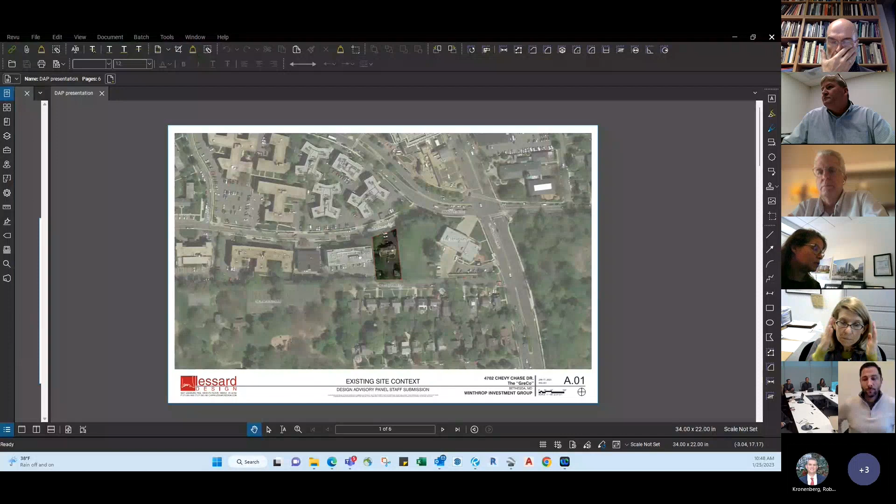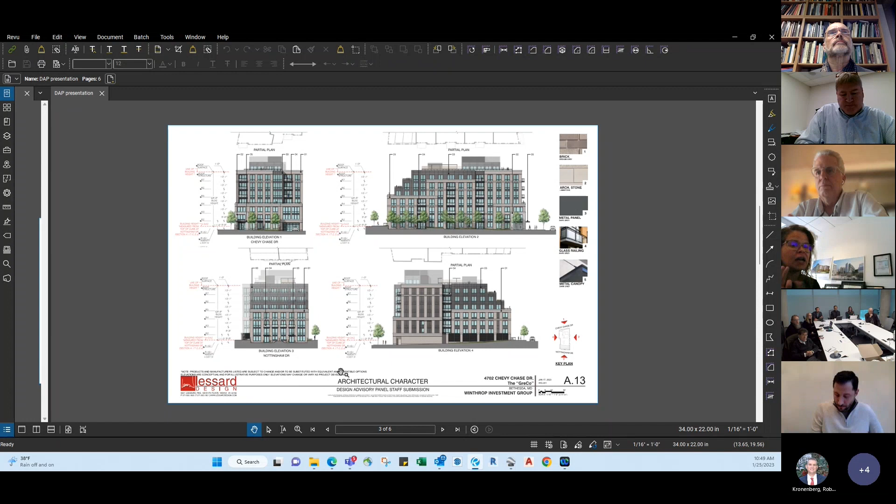If I can summarize briefly, I'll jump right to the elevations. What we did is we took your feedback, like Pat said, and focused on simplification of materials - how can we simplify the details, how can we add consistency in the details, and how can we refine some of the massing moves in order to come up with a cohesive design. I'll share with you elevations side by side of the different moves that we did to achieve this, and compare with what you saw last time.

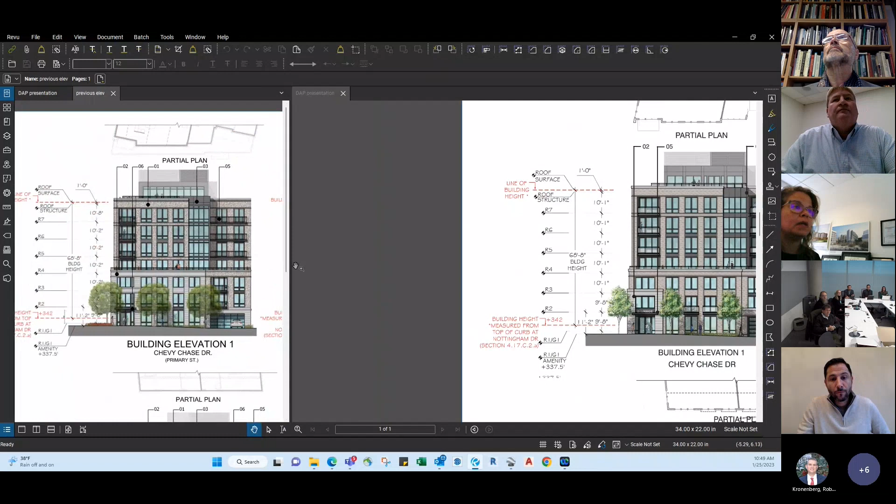On the left side of the screen, I'm going to show the previous elevation, and on the right side of the screen, this side will show where we are today.

Starting with an overall look, one of the things we addressed was material. We reduced some of the stone materials we previously showed as a 3-story stone element, which was competing with the rest of the materials, so there was no dominant material or hierarchy in terms of material and texture. By reducing it and only highlighting the entrance, it makes brick the dominant material of the building on this facade, and it focuses attention on where the entrance is by changing material only at that location.

We also looked at what happens above the garage. The garage is recessed, as you'll see in the rendering, so there's depth in this area of the elevation. We created symmetry in the design by using similar windows and narrowing the pillars in the middle, so it feels like a larger opening with pillars on either end below. That was one of the comments we heard, and by doing that, the weight feels like it's going to the edges rather than the middle.

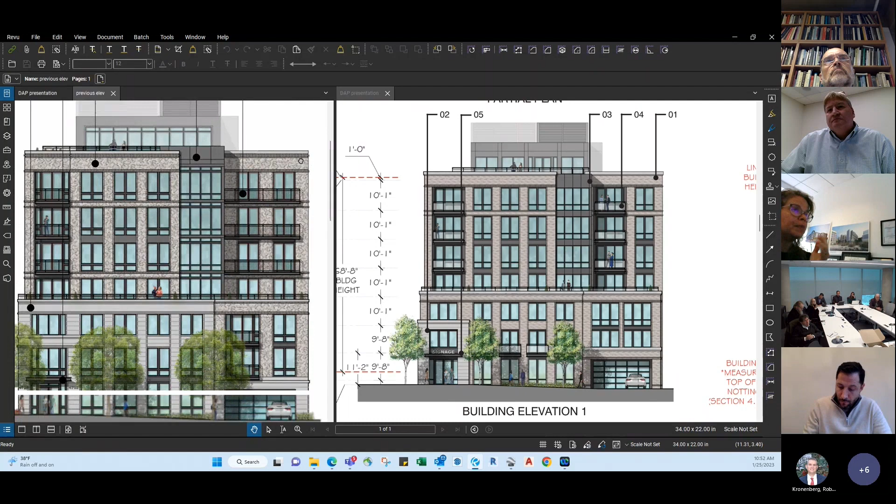Another comment was about making consistency in the details of the cornices. In the previous design we were showing a variety of details at the top of the cornice. So we went back and analyzed how we could bring consistency in the dimension and how we treat the upper part where the brick ends. That's one of the differences you see between before and after.

Another change, these are subtle changes, but I think they bring the design to be more cohesive, simplify it, and bring elegance.

We looked at how to combine windows into a more vertical design and let the pillars come down and align with the pillars happening at the lower level. One of the things we did while looking at those cornices was to create similarity in the depth and the height.

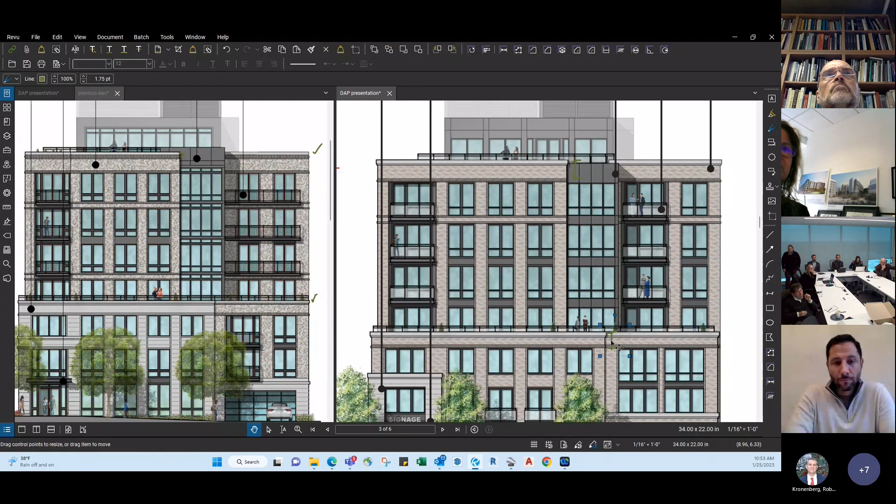We played with what's happening at the header of the windows, for example. We added an element at the header of the window to get similar distances in the design, from the top of the window to the top of the cornice. So that's the front elevation.

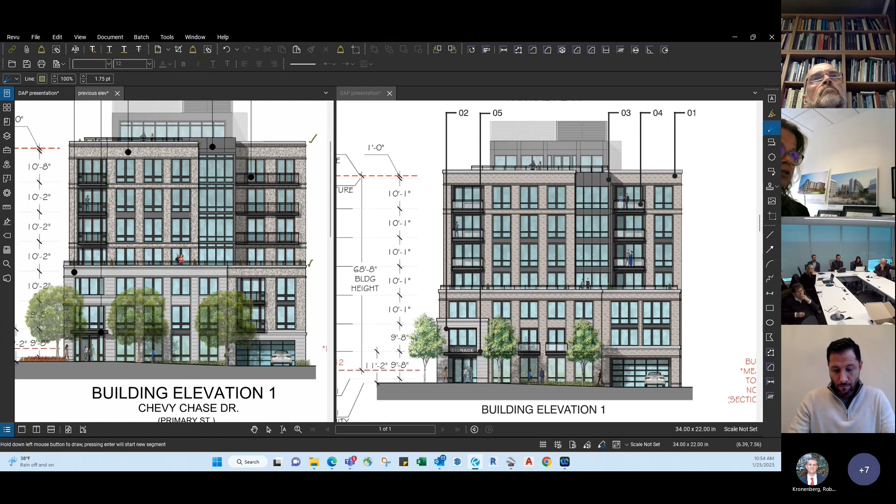One thing we did differently is provide some Juliet balconies more at the pedestrian level, just to provide more articulation in the facade and make that area more active. That's the big picture of what we did on this elevation.

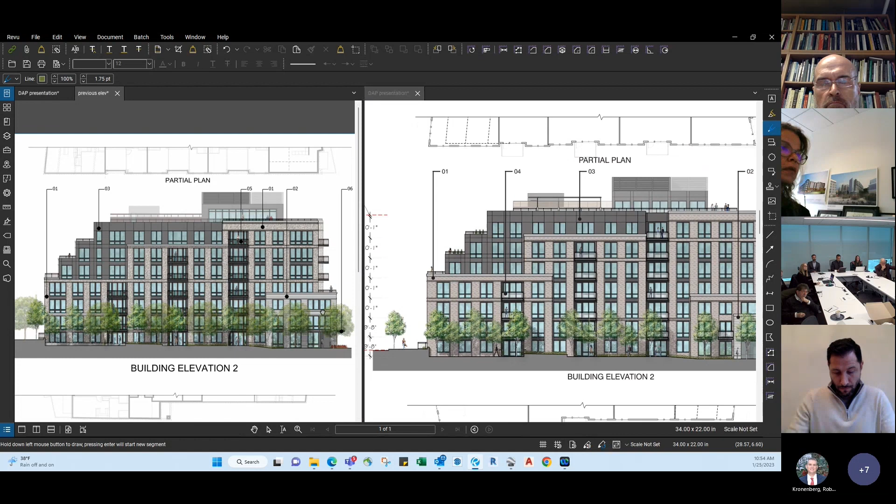Then I'll move to the east elevation, the before and after.

Again, we reduced the stone material. Before, we were wrapping this stone material over to the side of the building. One change we made on this elevation is that before it used to be only one plane, except for the recess of the balconies. So we played with the depth of the wall itself to provide a break in the massing and show variation in where the materials end.

So we introduced a break here, using the balcony to create that recess in the massing of the building. We reduced the stone material here and only provided it at the entry of the building, creating a gateway or archway, like an exterior vestibule into the building. There's a change in plane at these elements here and here.

Then as you go to the southern part of the building, it steps down toward the Nottingham side, and we introduced a change in the massing. It's a subtle change, but it helps provide different proportions to the sections of the building.

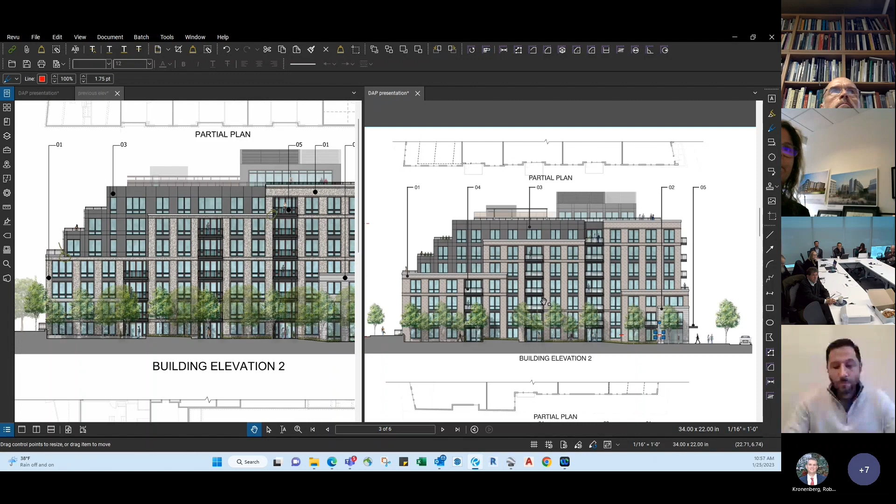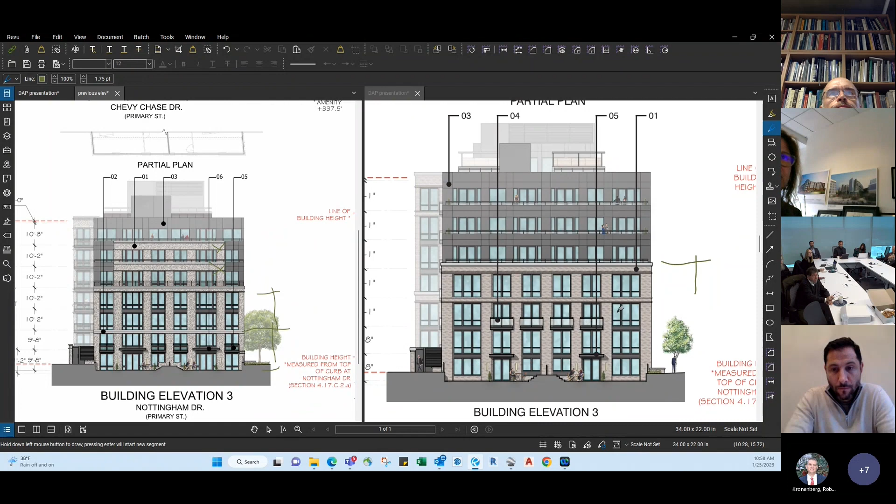In the rear south elevation, one of the comments was that maybe we're showing too much brick, or that the brick felt like it might be conflicting with too many details on the upper level. So we looked at when the building steps back and eliminated the brick happening above, keeping it simpler on the upper steps by having the same material wrap around. On the lower level, we kept the brick but grouped the windows to provide a taller proportion with groupings of three, following the same language as the groupings of three and how the cornices wrap around the building.

I personally think that before, the brick felt like it was just applied onto the facade—there was no change in depth. So we agreed that changing that to the metal panel looks much cleaner and simpler.

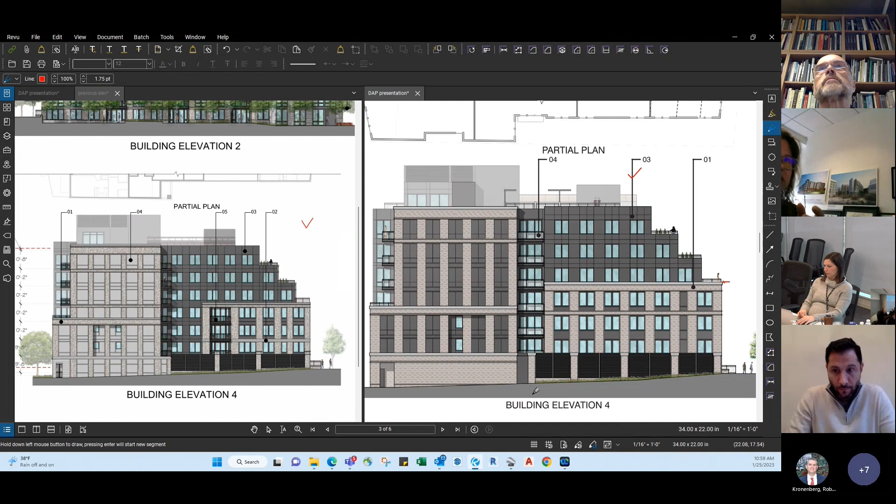Moving on, you can see we wrapped the cornice along this facade. This is before and this is after. We're using a balcony break here, similar to what's happening on the east facade, to break the mass and give the brick an opportunity to end in an inside corner, wrapping the detail across.

On this west wall, we heard comments about the color of the materials we were using, whether to have a light material versus the dark panel material. We looked at it in different ways: either a light color for a subtle change, or a dark material for a more cohesive language and material palette on the building.

So we decided to take that feedback, eliminate the light color material, and create more simplicity and continuation of the details happening in the building. The cornices wrap around with the same dimensions across, and we simplified some details so it didn't feel as busy as before.

For example, at the base, before we had a series of metal panels with variation. We thought that simplifying the base, making it more consistent with what's below and letting the details happen above, makes it a better design.

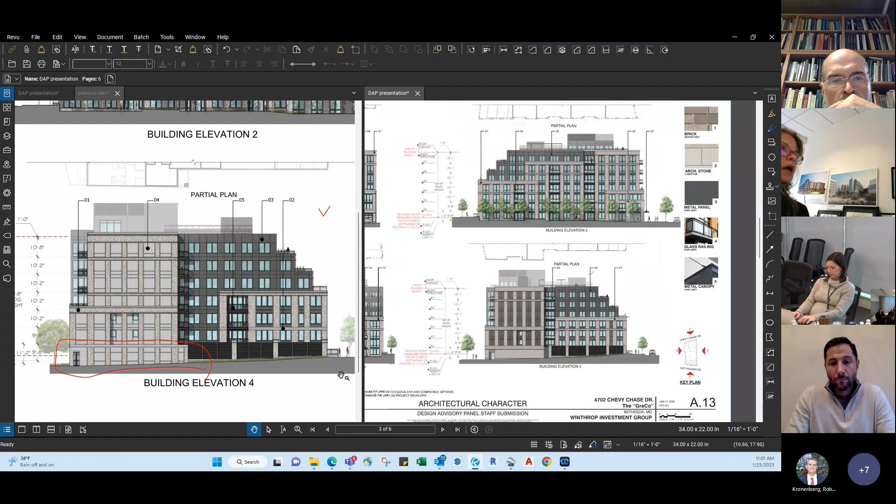That gives you a picture of the elevations, and now I'll show you the renderings. This is a rendering from Chevy Chase Drive. You can see that by maximizing the use of brick on the ground floor, it makes a more cohesive design and simplifies the variety of the building.

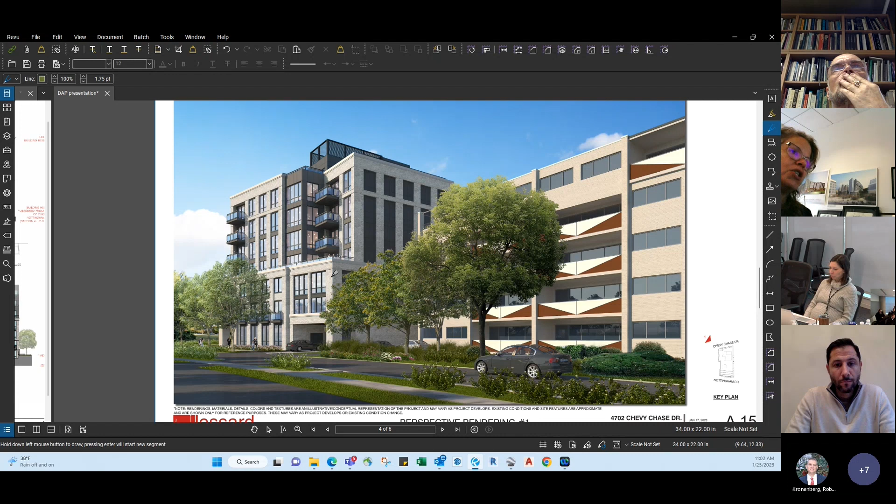You can see there's a lot of depth that you don't see on the two-dimensional elevation, and how the building steps and is articulated on this section. You can also see how the garage entry is recessed into the building, the change we made above the garage, and how the cornices and details wrap around the building.

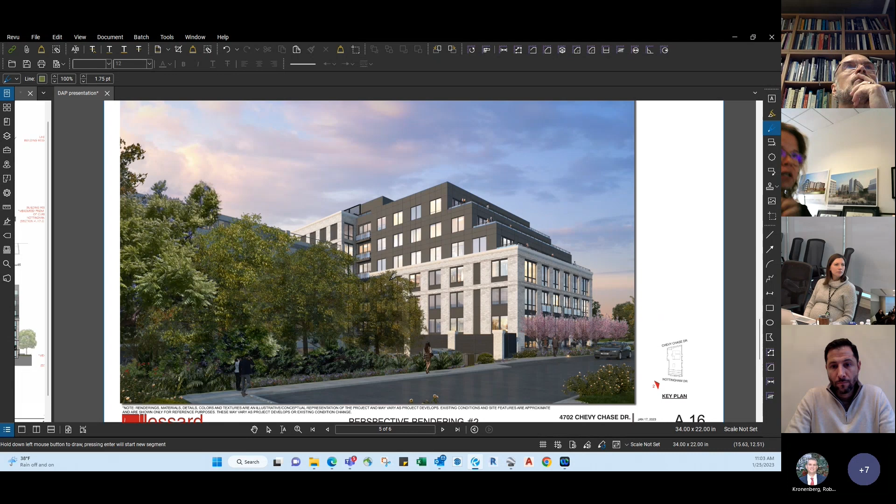This is a view from Nottingham. If you imagine before, we had brick on the upper levels—by removing that brick and maintaining the details on the lower portion, it gives a better proportion at the lower pedestrian level.

Finally, this is the rendering view from Chevy Chase Drive of the east facade. You can see how we use the balcony to recess into the building and have the brick wrap in and end on this corner, with a subtle change in massing to provide additional articulation. Our goal was to simplify the use of windows, details, and materials to create cohesion in the design.

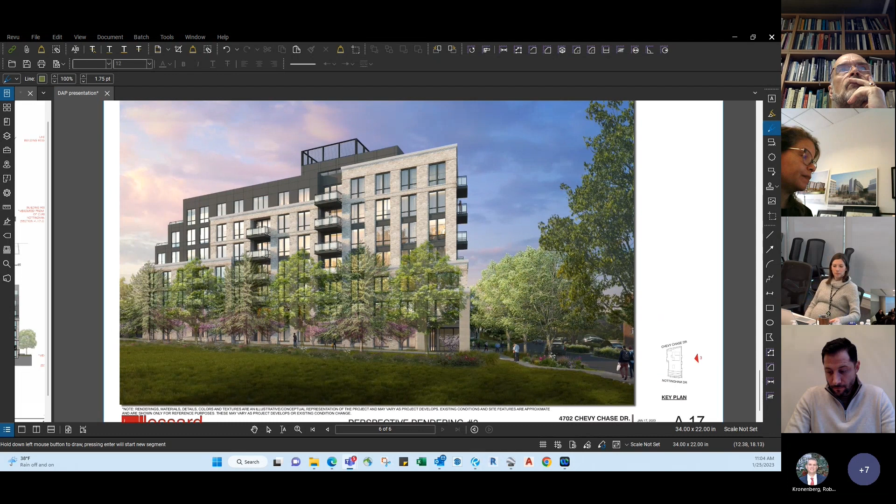And with that, Pat, I'm not sure if you have additional comments, but this is the last exhibit. Thank you, Liz. No, I think we're happy to answer any questions you may have.

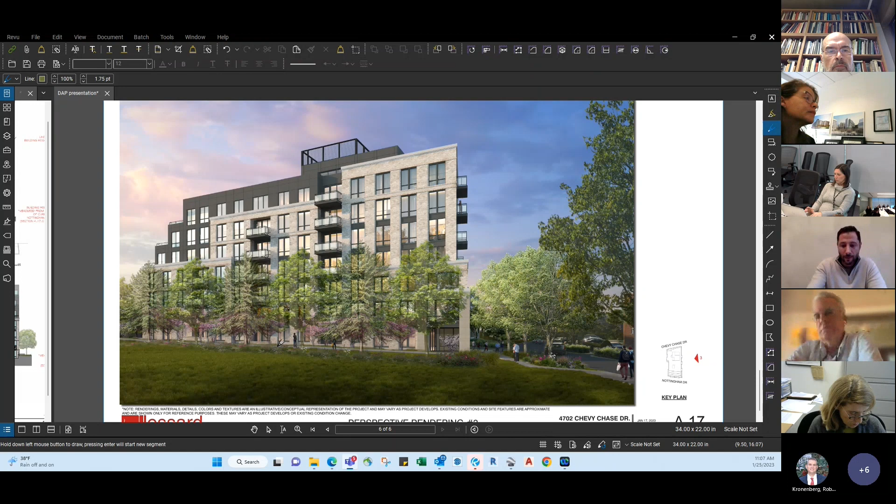So I think this definitely keeps going in the right direction. I thought it was an attractive building the last time we saw it, but obviously some of my colleagues had specific complaints here. But I think what the architect said, these are a series of subtle changes, and it definitely comes through and improves the look and feel of this building.

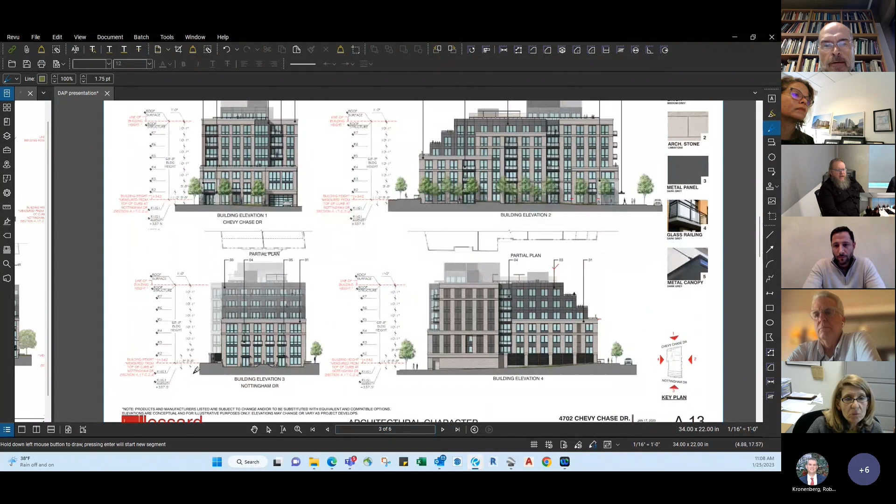Can you pull up the southern elevations so we can think about Brian's points? Brian, can you remember, do you have a rendering of the southern elevation? That would do it.

What I was saying is that if you look at the aerial that just flashed past us, the canonical new urbanist way of changing a building typology from a multifamily building like this one to a single family building would be done at an alley and not on a street front. But the block structure in this particular portion of town is circumstantial. It's just too small to do that.

So the zoning permits a big building, and I'm wondering if the big building can perhaps be modeled such that the facade on the southern edge might be broken slightly, so that maybe there's a possibility at the center base to push back slightly, and perhaps even model that more as a reveal, maybe even allowing that grayish material to come through, permitting a reading at that point of something more akin in scale to the buildings directly across the street from it, and kind of balancing off the street section to some extent.

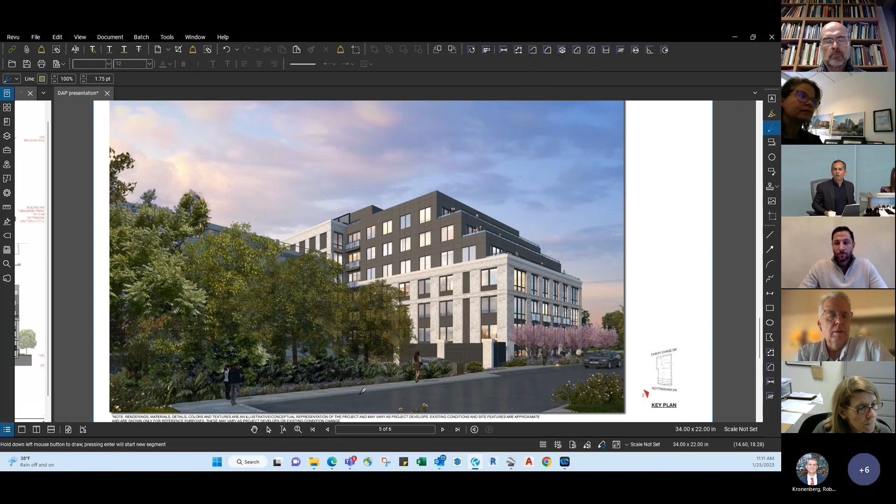Brian, this is Atul Sharma with the director's office. I'm happy to hear you bring up that Wardman apartment building as a precedent. I actually lived in that building for several years, facing Cathedral Street, and I think some of the points you're bringing up are really good, in that this building has created the horizontal stepping back very successfully, but it is perhaps the vertical articulation that you are trying to get a little bit more refinement on.

To your point, I think the Cathedral Mansion does a few things to bring down the scale. It does have the setting in and out of the bays. Those bays are much wider, but that effect could be achieved here with the 2-bay, 3-part composition. The other thing it does very well, it applies a very deep cornice at the 3rd floor level, as opposed to the 4th floor level, so that the building itself reads more like a 3-story building versus a 4-story building.

So I just offer that for the DAP to consider, that maybe on this facade, the main cornice application can be at the 3rd floor, and the building can have a little bit of a stepping back in the middle piece of it, and perhaps have a more significant entry piece at the first 2 floors, which is another element that's used in that precedent very effectively to break down the scale. So just wanted to share that with you all, and happy to hear the DAP's thoughts.

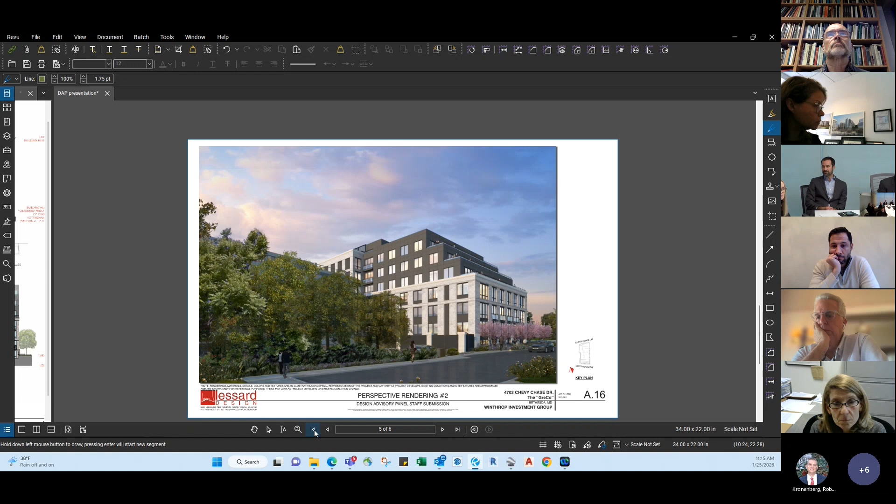Yulia, did you want to share some comments? Yes, I have some questions. Was there any discussion about what type of mechanical system, specifically exhaust, that would be used? And what I'm looking for is, is it going to be vertical or horizontal? Because, you know, if it's horizontal, we should probably see more detail in terms of articulation of that on the facade.

I guess that's a question for the architect. At this stage, we have not defined the details of how it's going to be ventilated. Both options are on the table. One of the things is because we have the green roof requirement we have to comply with, it reduces the amount of space we have for green space on top. So it might be that there's a combination where some of the ventilation is horizontal and some will be vertical. So my comment - at this stage it's not being fully decided.

Okay, I understand. So my comment would be that if it's a horizontal exhaust through the facade, it would be very important to show that on your elevations and renderings. It would probably affect the location of your operable windows, and as we look at the facades we would see thickened mullions around the areas where you have operable doors and windows. Aesthetics of those exhaust openings and their locations would be very important because they will significantly affect those facades - probably changing the rhythm of how you're dividing the volumes right now.

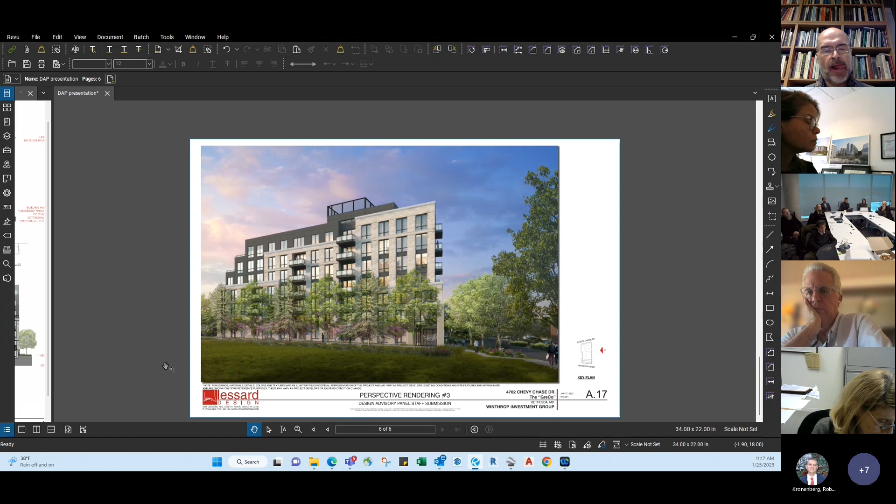And so I have a question - this is Elsa, Chief Down County Planning. Can you go to the front elevation? I don't think you see it on the perspective rendering. Maybe this gets to Rod's point about how it's physically articulated, but the asymmetry of it is a little jarring to me. Does anybody else have that sense? It's not quite symmetrical, but it's not really asymmetrical either - from a design excellence standpoint, am I alone in that?

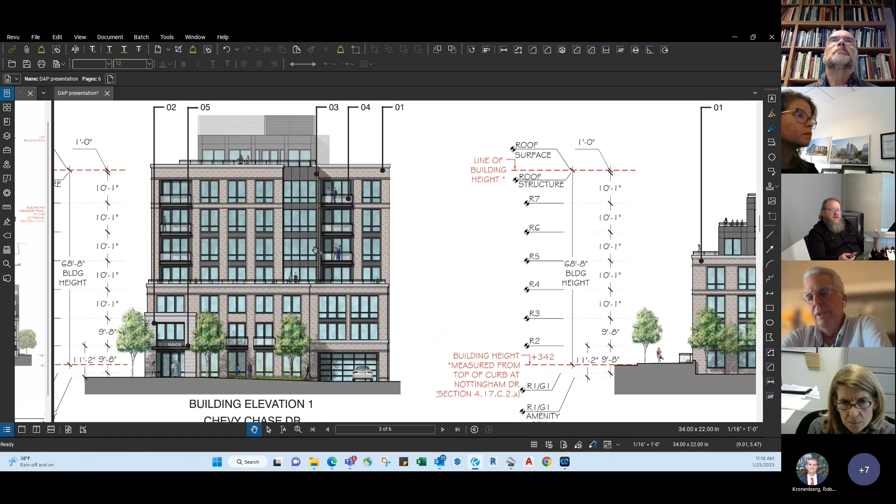Yeah, I guess you don't see that shadow line for the first 3 floors, right? When you look at the 2D, this is much better, but it's also from a very specific angle. I wonder what it looks like when you're right across the street and the shadow lines are actually correct. So when I look at the 2D, I'm a little concerned with the asymmetry and things not lining up with what's happening above. At the same time, there is a bit of a step back, so maybe there needs to be another rendering from a different angle - from the other direction.

Yeah, I think it'll be really important, Elsa, to your point, to look at this building from the other side where you see the main entrance into the lobby, which is kind of obscured by the tree right now. That portion of the facade should read more as a continuity from base to the upper floors, and if it does already, that's great. This piece of the facade I personally don't mind being broken down because it's the entrance into the garage, and there are some step backs in the upper floor levels, making this side of the elevation a little less significant. If it was all lined up, you might start to pay more attention to the garage and things, but it would be really important to check from the other side that the continuity and symmetry of floor-to-floor continuation is expressed.

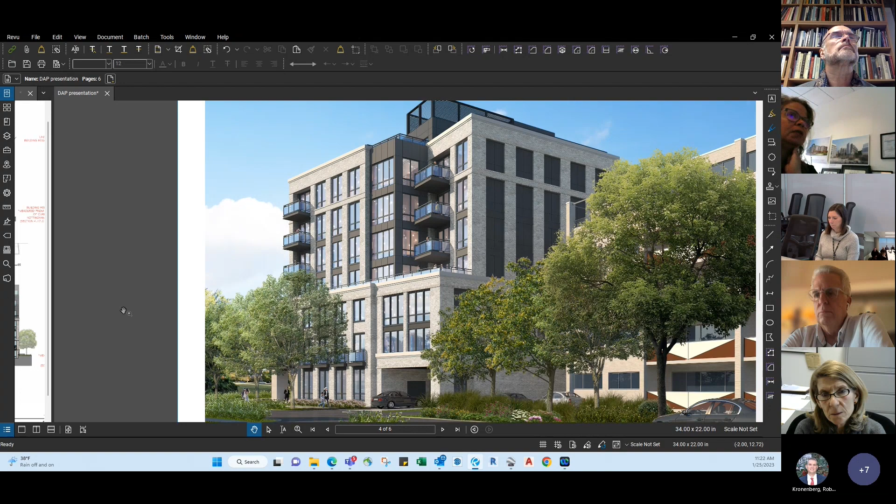I don't have it prepared, but if you give me a minute, I might be able to pull something up. If there's additional comments, I can see about that. Paula, do you have any comments? Sorry, I cut this nice gentleman off, but if you didn't have any comments, we can come back to his points.

I think there were some comments in previous meetings about the symmetry and asymmetry of this front elevation, and I think they've actually handled it pretty well. So I'm happy with where it has gone, particularly on this front elevation.

One of the things I think is important on the Nottingham side is that the way it is existing is a narrower street, and we're widening it. So the building in reality is stepped back from where the existing street is, adding more dimension, more distance from where it is today to the family homes that are there.

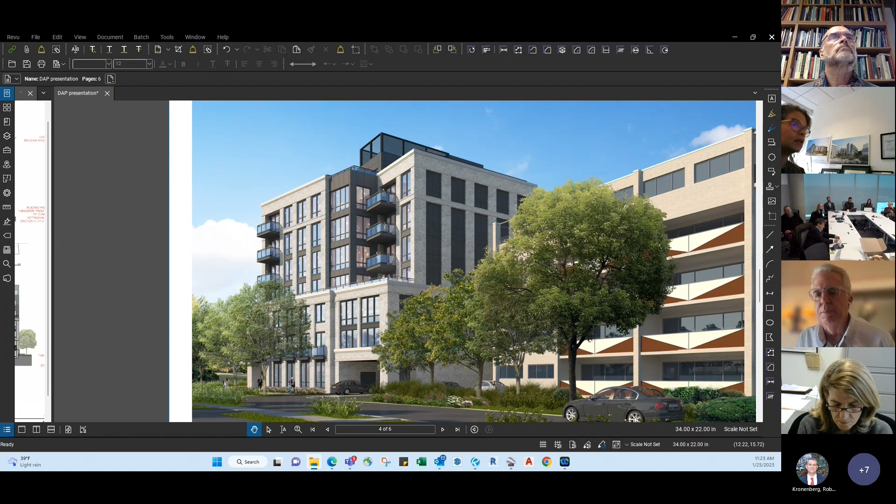Let me see. Rod, you're muted. Okay, if I could pick up on Brian's comment, I think Damon and I have had a different kind of perspective on seeing this project. I think we've seen it maybe four times now, a couple times during sketch time. One of the big controversies in the project initially was, let's call it, the rear of the project on the residential street.

They have made considerable improvements in the design from the massing solution to where they are right now, probably the biggest being getting rid of the loading dock that used to put the rear end of the building out to the residential neighborhood. Having said that, I think Brian's comment is really good and will make the project better, but to give the architects and developers credit, they have made significant progress on that rear elevation.

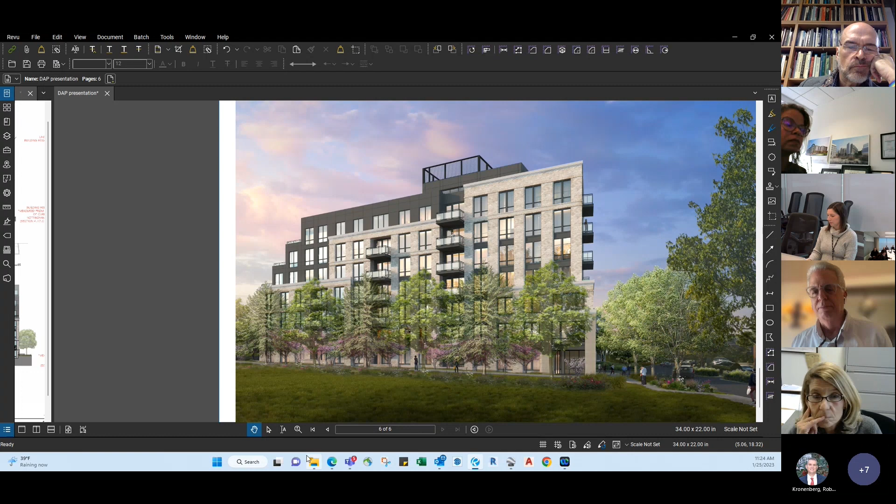You're here, fully agree. Sorry, sir, so I think your comments were focusing on this - could you reiterate for the group?

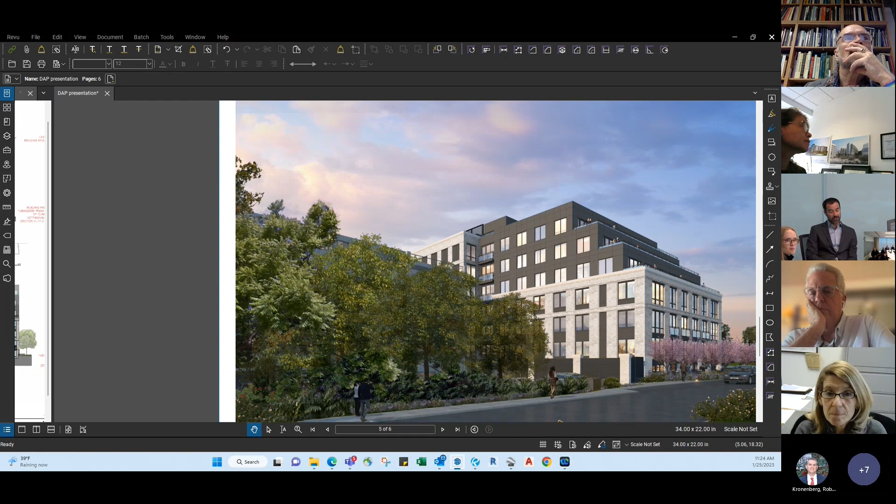Sure. Yeah, I think they've done a tremendous job, and I'll echo what others have said here. They've really taken our concerns on the streets and responded to them in a professional manner. I compliment Pat and Luz - they've been professional through and through, and we really commend them for that. They've been a great team to work with, and I'm excited they've engaged the right design professionals to work across the street from us.

So I think the southern facade still gives me a little bit of pause. It's really 4 stories on our street and 37-ish feet of height. If some consideration could be given to stepping back at the center, I think that's a tremendously awesome idea - if it reads like 3 separate masses facing Nottingham Drive, that would be great. I'd like to see consideration given to, instead of descending 5 or 6 risers to those units facing Nottingham Drive, maybe ascending 5 or 6 risers instead - I think that might be an improvement for us.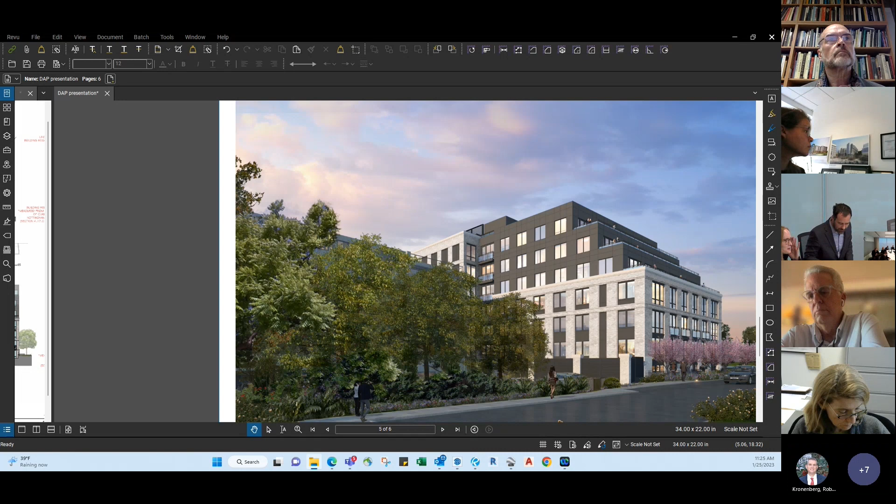And there's a county or development typical detail on sheet, let's see, I think it's A.08, on the left-hand side - it's a 3-dimensional rendering showing a streetscape with trees and setbacks, and it really does show 3 stories facing the street as a design standard. I understand the way the site slopes, it's higher on Nottingham Drive by about a half a story until you get to Chevy Chase Drive, sloping down about a half a story.

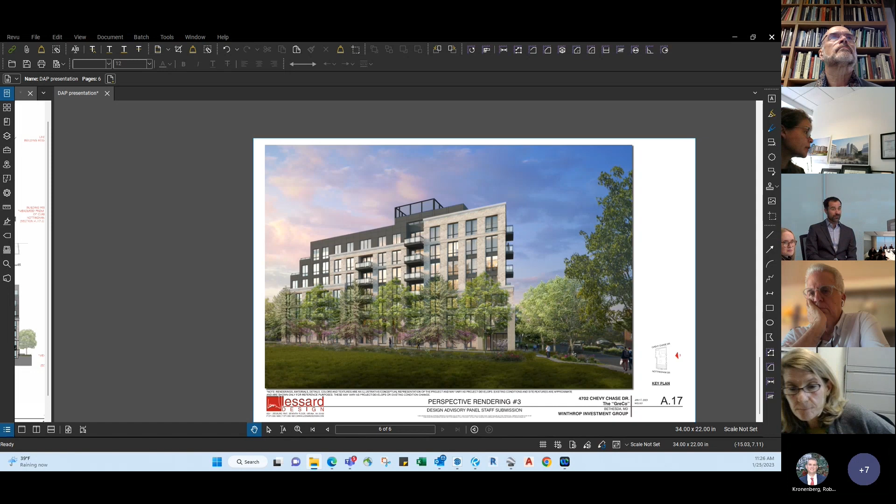So I understand the design challenges there, but I'll echo everything everybody else has said. This east facade is the first thing I'm going to see driving down the street, and it's great - I love it. I think it's a really great way to interact with the neighborhood and break up the massing. I can see they've made a conscious decision to shove the mass towards Chevy Chase Drive for less visual impact, and I commend the design team for that. That's what I have for the south facade.

May I ask what your structural system is for the floor? Is it PT? We're still refining that detail, but we do not think it's going to be wood construction, so it just makes it a shallower system. We don't know yet what the specific system will be.

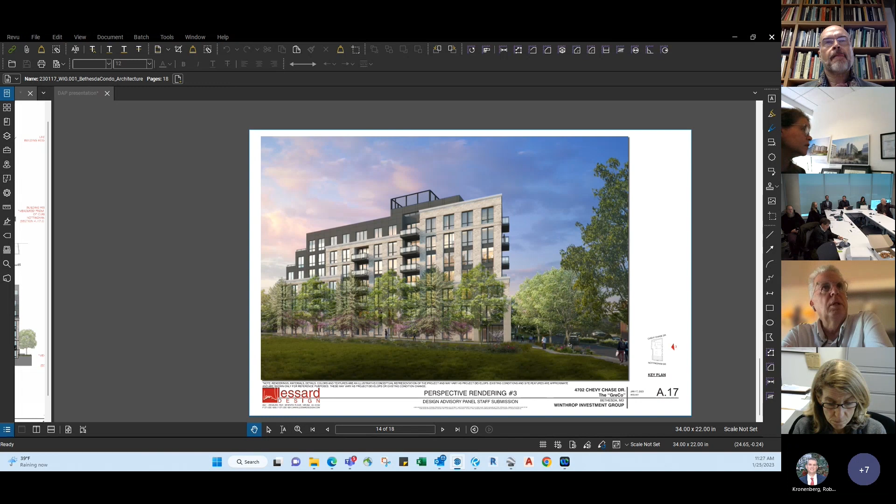Let me see if I might have an image that's more frontal, but it's not a render image. It's just a massing clay.

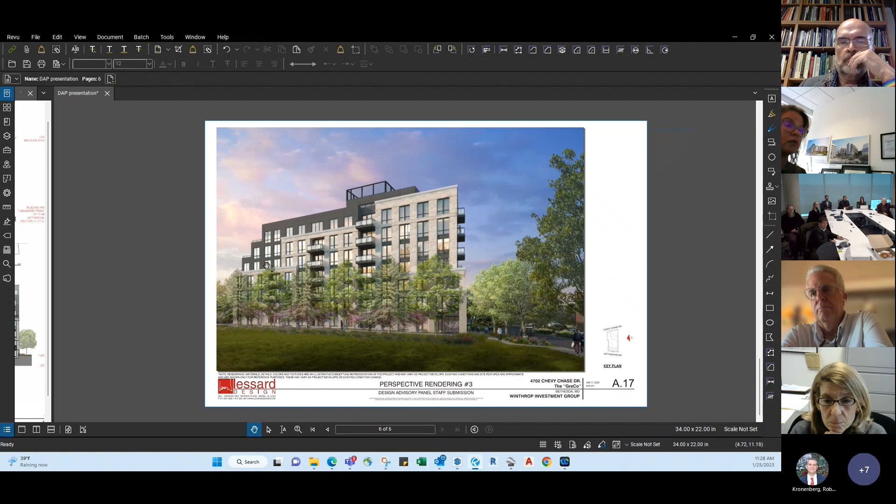If this is something that shows the alignment of the windows, what's happening above, from the Chevy Chase Drive.

Pat, is this something that you were referring to? Yeah, I had actually thought that we had something that was a little closer to a finished product, but not quite, but maybe we don't have that.

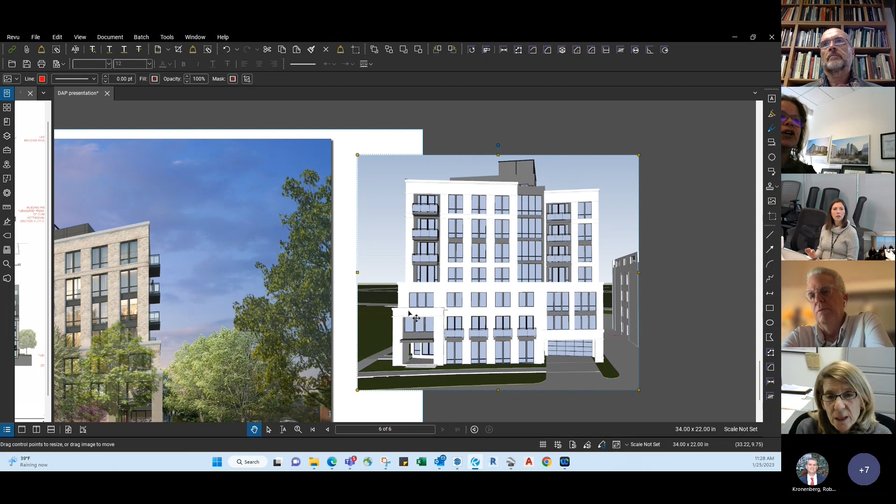Can you rotate it a little, so that we're looking at an angle somewhat? It's just a static image, a clay model. Doesn't have any materials or anything. But I do not have the final product on that side.

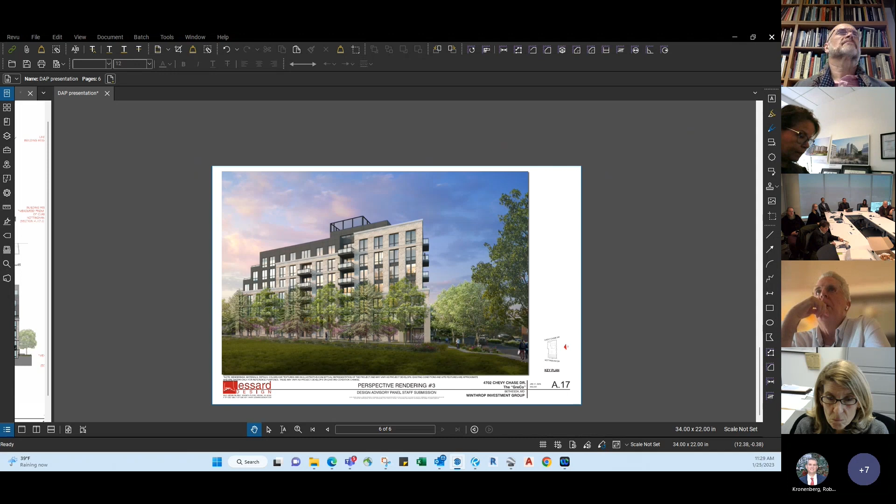I'm hoping that the image of the elevations - and I get Rob's point that just looking at the elevations it's hard to discern - but looking at the elevations in concert with the perspective that you see here, hopefully that gets you comfortable with the way that front facade does look.

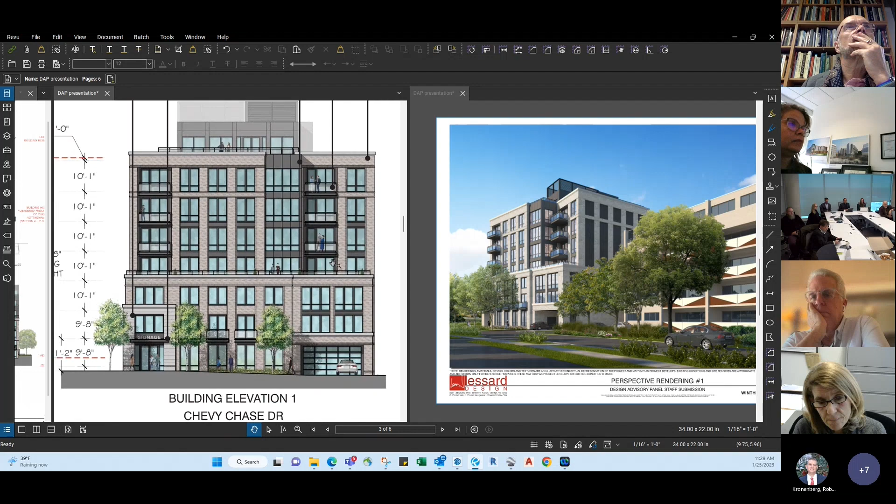Elsa, to your point about the symmetry and asymmetry of it, if you look at the rendered elevation from the side, you can see four bays that are very continuous from the bottom floor to the top. In this elevation, there are 4 bays that are pretty continuous, but then there's a 5th bay in the base, closest to the garage, that kind of is an added piece.

I wanted to hear from the DAP if they thought a little bit of a simplification there would help, where you have just 4 bays that continue through the elevation, and that 5th bay gets further simplified, so that it creates a symmetrical bookend to the corner of the building as one turns the corner from this elevation to the side elevation. Would that be something that the DAP feels would be a positive small tweak and solve some of the concerns about the symmetry and asymmetry?

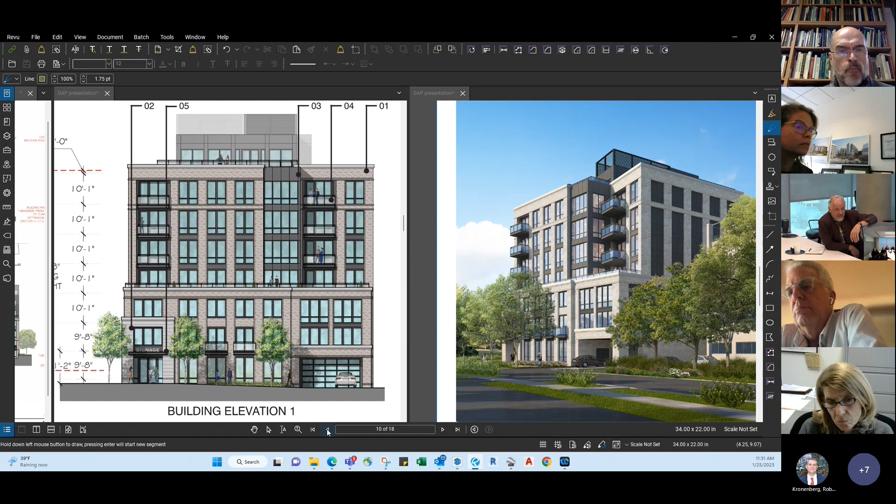I actually like that 5th bay because I think it brings the entrance into the symmetry of the base. So I actually like it the way it is. But this feels like a small detail, and I appreciate the simplification of the materials.

And the entrance, at the bottom left, has a treatment that's really found nowhere else in the building. It may just be the rendering, it may just be the way the materials are rendered - it's the same material but in a different application. But it feels a little left over, like there was this nice refresh and simplification, and then you have this other piece that's left over.

It seems like maybe an opportunity to use some of the language or materials that are accenting the other facades for the entry. I think that's a really good point. I was really happy to see the base convert to brick - that was a nice improvement. And yeah, this does feel a bit token now. So I agree with Eliza on this, actually.

I'm not an architect, so, but one comment, and I'm curious of the response from either Luz or the panel - aren't doorways often sort of celebrated and punctuated? And I think that was the intent here.

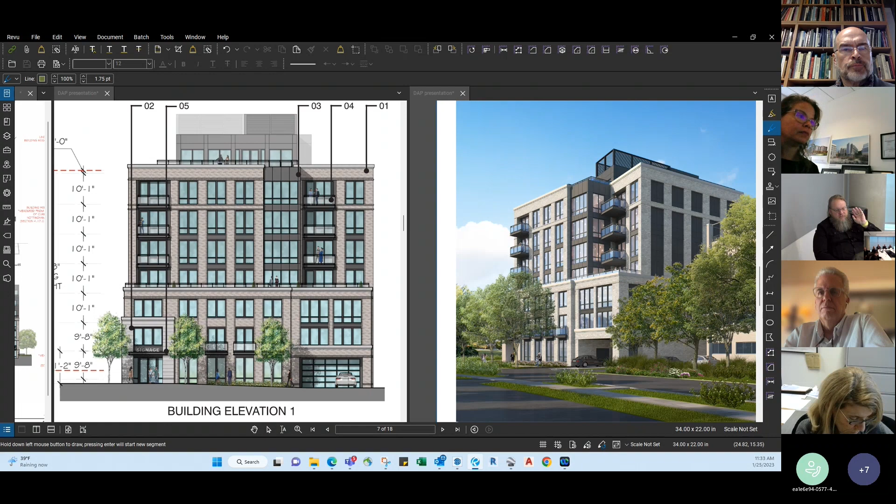You would get that with a canopy, right? Well, that certainly would be one component, yes. But you can still give it this treatment within the existing material language - this looks like you have a different material, it's precast, it's whatever it is, it's a third material. It just feels like you could give the same highlight within the existing material language, and it would be - yeah, this feels a little bit like a retail front.

Like the retailer came in and did something that let you use the existing materials in a different way. Is this stone base appearing anywhere else on the facades besides this corner? On both sides of the corner, that's it, around the corner, because we have an entry from here, and we can also enter from the side. So it's like an outdoor vestibule area.

What Pat says is correct. We wanted to have a differentiation in the entry and highlight it, so that somebody would say, here is the front door.

It might be the way it's rendered, but it's meant to be, you know, architectural stone, smooth, limestone-like material with joints very close together. It's hard to represent that at such a small scale, but it's supposed to feel seamless. We are tying that in with what's happening with the material used at the cornice, how we are capping the top of the brick, and that color detail, which is small, just ties in on every facade.

But our goal was to highlight the entries with something subtle. The tones are the same using the brick. If the brick has a variation in tones, then the limestone will be a more toned-down or simple color that will highlight the entry.

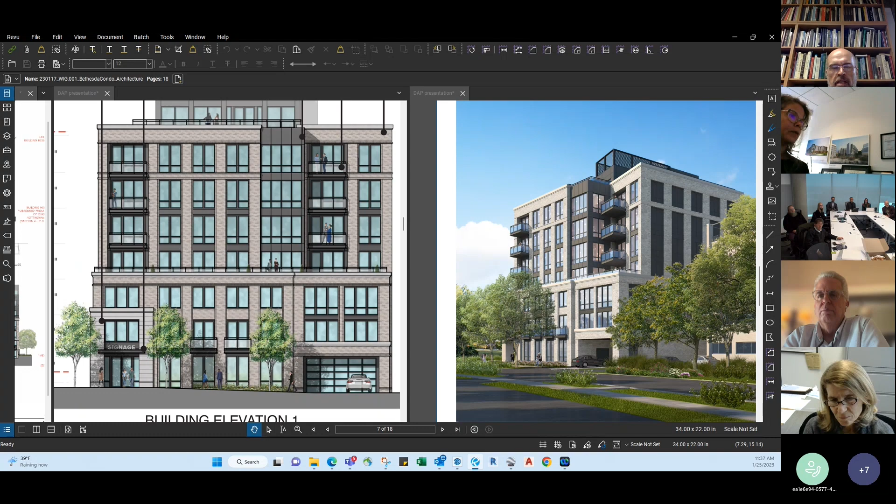But maybe where it says signage, maybe that ought not be a dark material, maybe it ought to be a lighter material. I don't know. Let's let the architects figure that out. We have five of them, or however many.

I think the fact that the proportion is not three-story helps it feel more intimate on that corner. And just like you mentioned, highlighted that it's different, we are accentuating the entrance, but we also don't want to make it too large or unproportionate. Yeah, that would feel pretentious, I'd say, a three-story one.

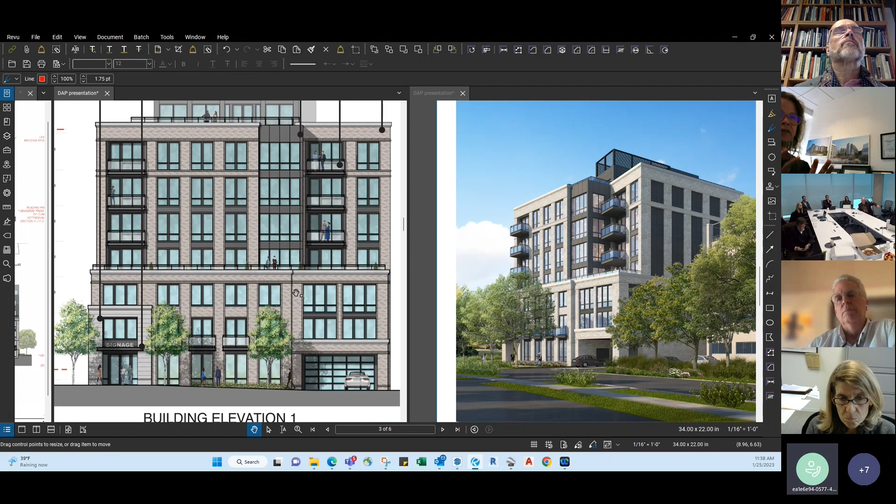One of the things that—I understand your comments on the Nottingham side, but now that I'm looking at this elevation, the fact that we have a break here, a subtle break, not a lot of depth, but it separates the elevation into big segments.

And I think in terms of height, adding another step—in all honesty, it's a very complicated interior space building, because every time we step, it adds complexity to many things. You also want to make the building feasible inside for construction and for what's happening in the interior. We have steps on the front, steps on the back, we have articulation. So it's a small building that has simplicity in architectural character, but complexity in many other ways.

So adding a step, or the appearance of a step, is more complex than adding a differentiation in depth. And maybe on the Nottingham side, it will ease your comments if we add a small break in a section, maybe making it feel like two segments on the rear of the building. And it speaks to the same language we are using here on the front of the building.

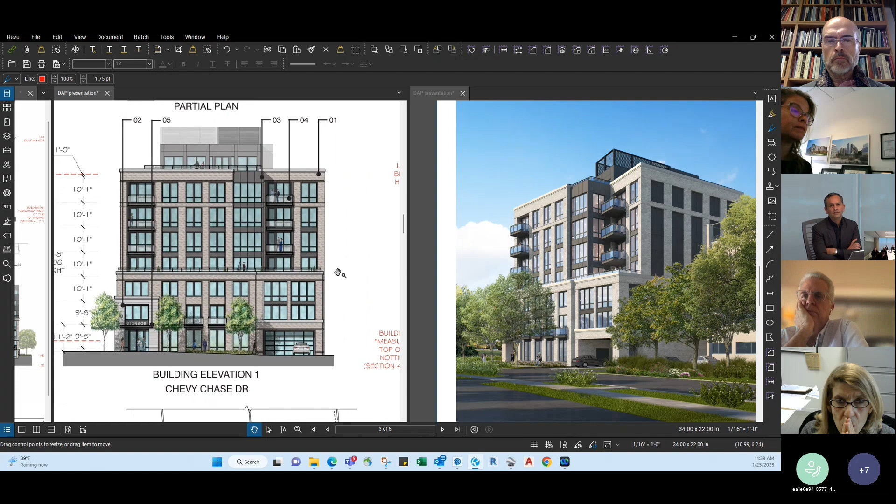To reinforce Brian's comments, could that break be towards the middle of that facade and not towards the side, so that the articulation becomes a 3-part articulation versus a 4-bay and a 2-bay? Because that will really start to give this building more of a townhouse proportion as opposed to the side end of an apartment.

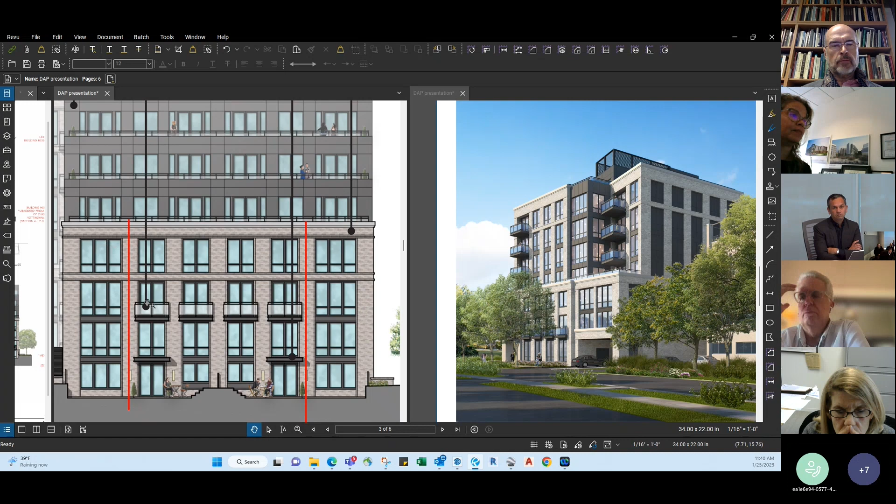Maybe we do a subtle change like this, and then that gives you differentiation. Just a thought, or possibility it's the center 2 bays that get pushed slightly back. And the pushback doesn't need to be gigantic.

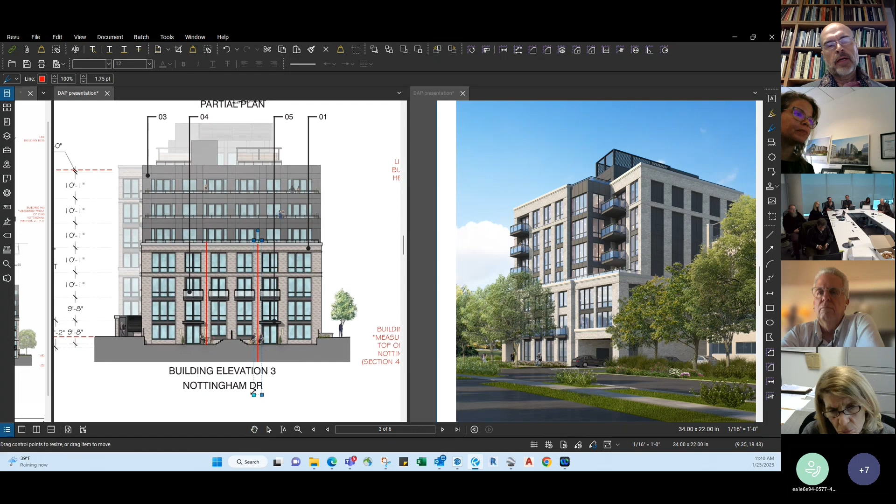I like the center 2-bay idea, if I may chime in. And if it matches the metal panels we saw at the front, I probably like that too. The step back probably needs to be nothing more than a foot to read like a step back, but I understand the design complexities associated.

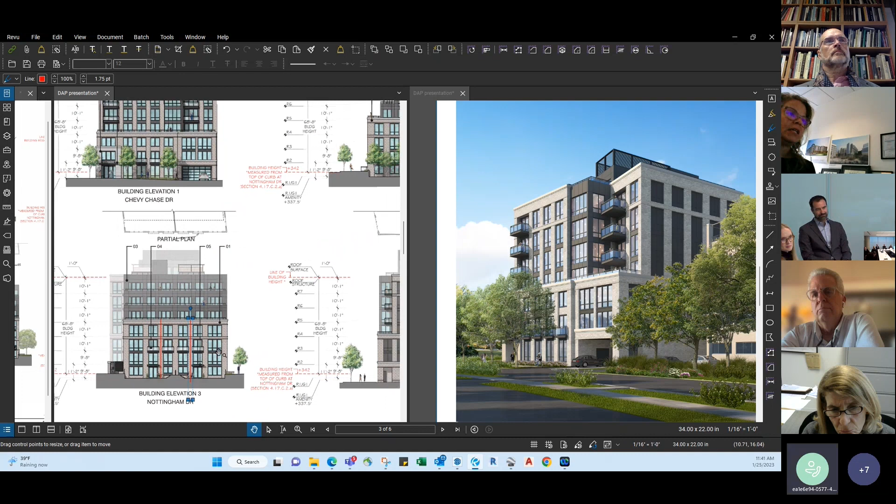I think we keep it in brick again because we want cohesion in the design. We have cohesion of what's happening on the bay. We don't want to cut and paste too many items. It's just a small move, and that breaks the scale a little bit more. That brings the language of what's happening on the front, and then we just have matching variation basically in every elevation. I think that ties everything together.

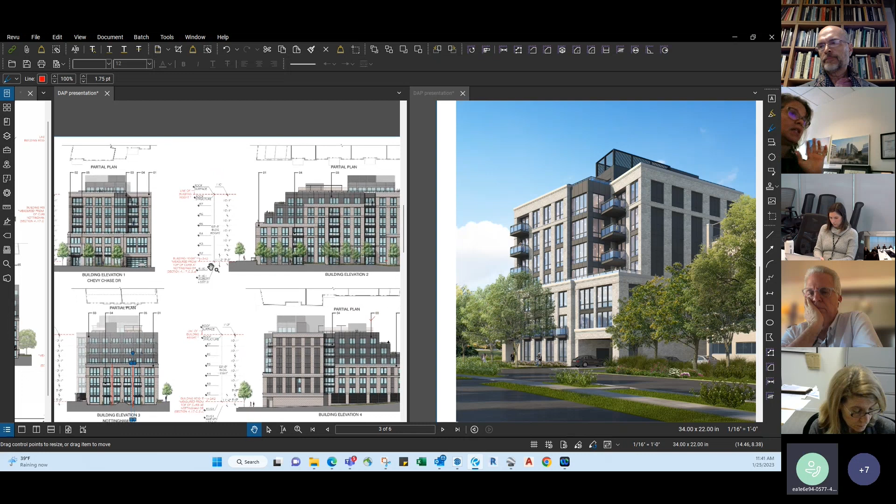Okay. I am hopeful, given, as Rod said, that we've been before the group 4 times, is there a way to capture that last comment about breaking up the mass on Nottingham in the minutes, so we don't need to come back to the DAP? Not that we don't love the DAP, but I think that would be the most efficient way to let us start proceeding with this.

Is the panel comfortable with that? I think what we would do, Pat, is take the vote with that being a condition that would be provided in the elevations during site plan review.

And to help wind down the conversation, the applicant is requesting 25 design excellence points for the project. Based on the conversation today, it looks like we're heading in that direction. Does the panel feel comfortable taking a vote today? You're muted, Rod. Yes, I do. I think we're ready for a vote on this. And is 25 points agreeable to the panel?